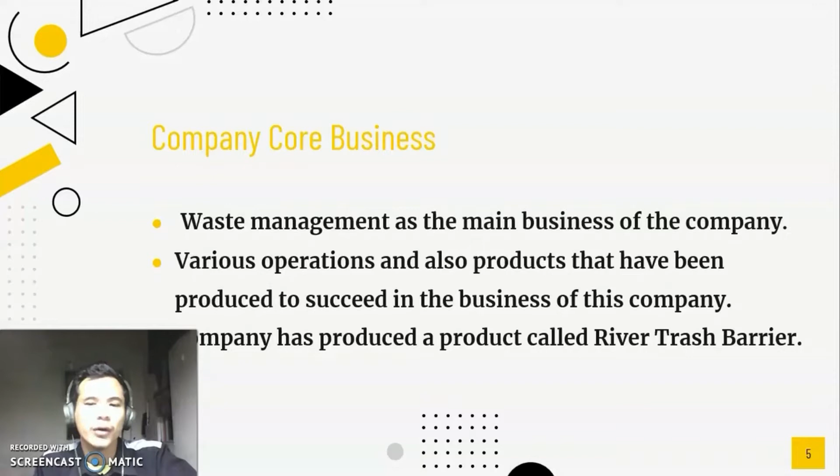Every company has their own vision and mission. The company's goal is to extract as much plastic and floating waste from rivers as possible. We want to achieve this through 4 pathways. The first one is clean up the plastic soup in rivers using our product River Trash Barrier. The second one, increase awareness of our product River Trash Barrier as a site for public tours and educational programs.

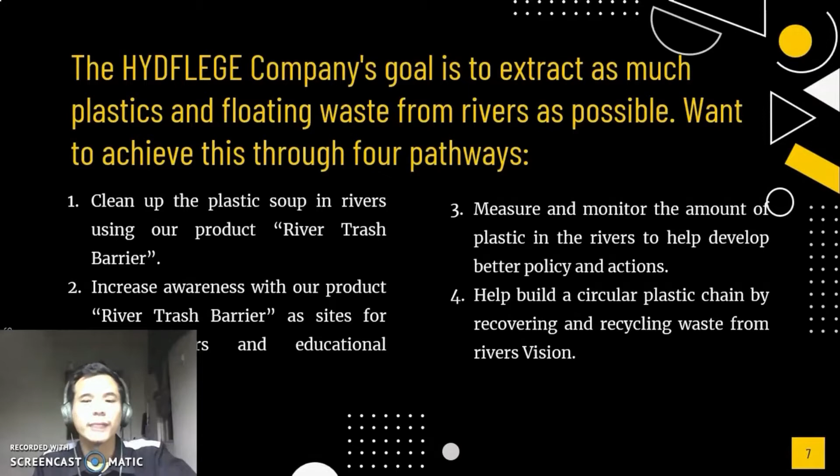The third one, measure and monitor the amount of plastic in the rivers to help develop better policy and action. The last one is help build a circular plastic chain by recovering and recycling waste from rivers.

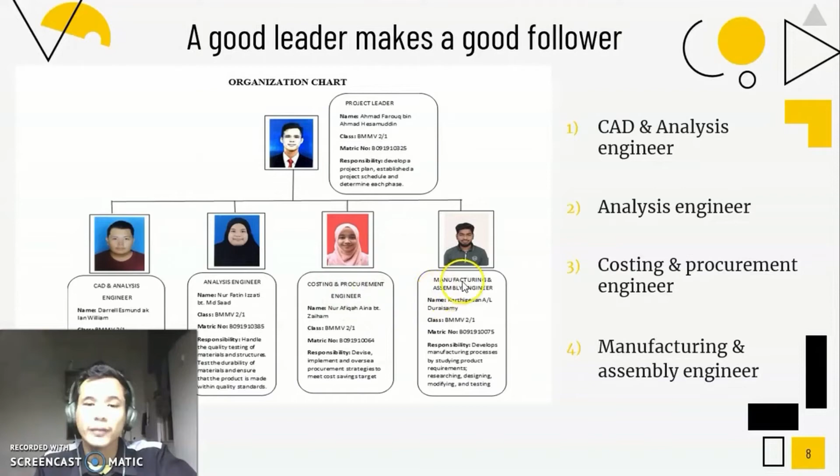So as we can see here, this is our organization chart. So you can see that is me as a project leader. We can hear that a good leader makes a good follower. So in our organization, we have a CAD analysis engineer, costing and procurement engineers, and the last one, we have manufacturing and assembly engineers.

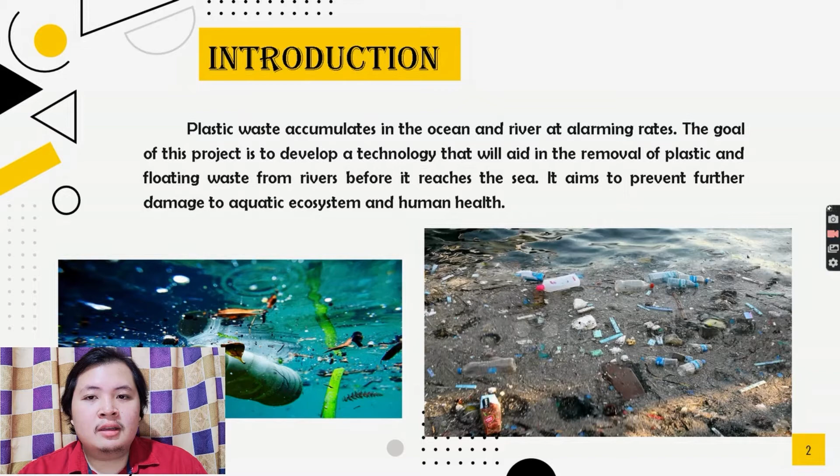Hello, my name is Darrell Esmund. I am the CAD and Analysis Engineer. So now I'm going to explain about Chapter 1, which is the introduction and the background theory. So for the introduction, as we all know, plastic waste accumulates in the ocean and rivers at alarming rates. So the goal of our project is to develop a technology that will aid the removal of plastic and floating waste from rivers before it reaches the sea.

So next is the problem statement. Rivers play a crucial role in human life. Although there are a lot of mechanisms created to reduce and control water pollution, the mechanisms still do not satisfy the requirements and are limited in scope. Most of the rubbish barriers are smaller in size. So when the barrier is small, the barrier needs to be cleaned more often.

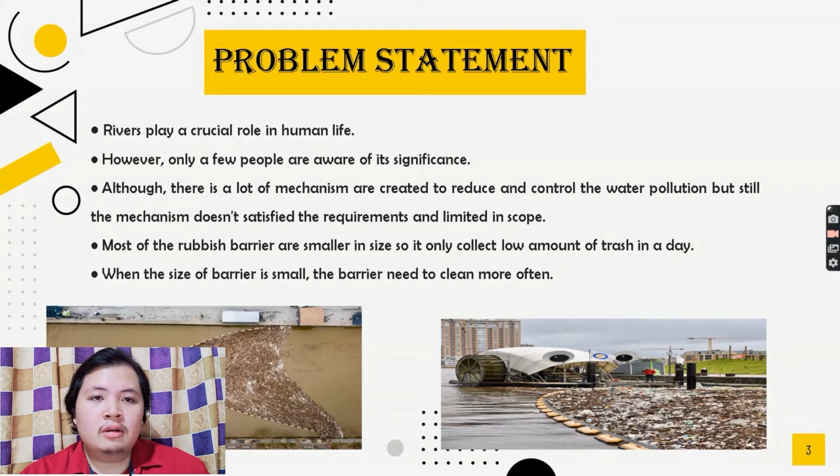So for the objectives of our project, there are three. The first one is to create a trash barrier which attaches to the riverbank in urban areas to collect the floating waste. Second, to design products that have aspects such as safety, aquatic friendly, and low maintenance. And lastly, the durability of the product should last longer than the existing products in the market.

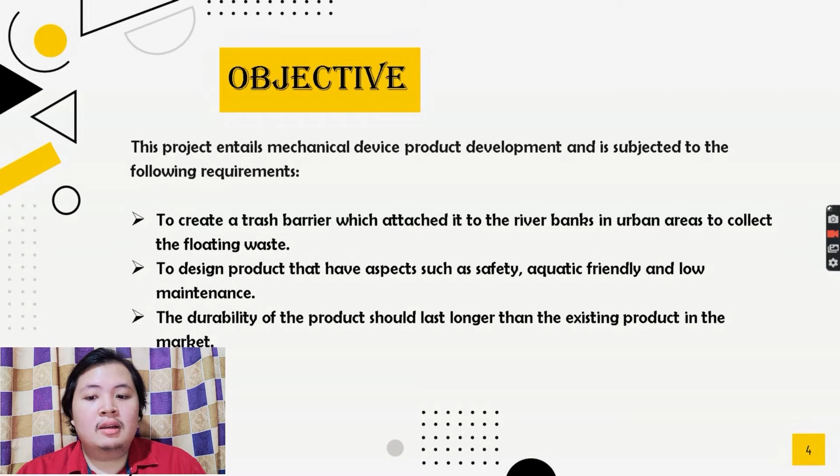So now I'm going to explain about chapter 2. As you can see from the slide, this is our flowchart. We start by defining a problem, and then we generate ideas from the problem. Next we did some literature study and some conceptual design. There are three design concepts that we did, and we picked one. We also did the final design using SolidWorks and analyzed it.

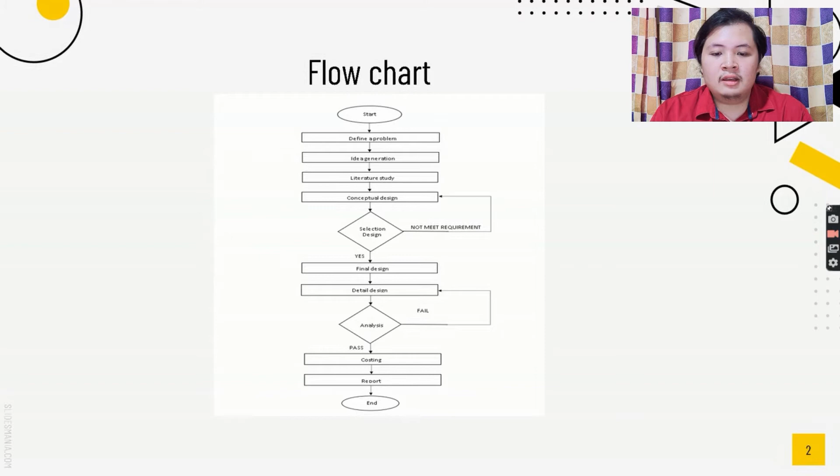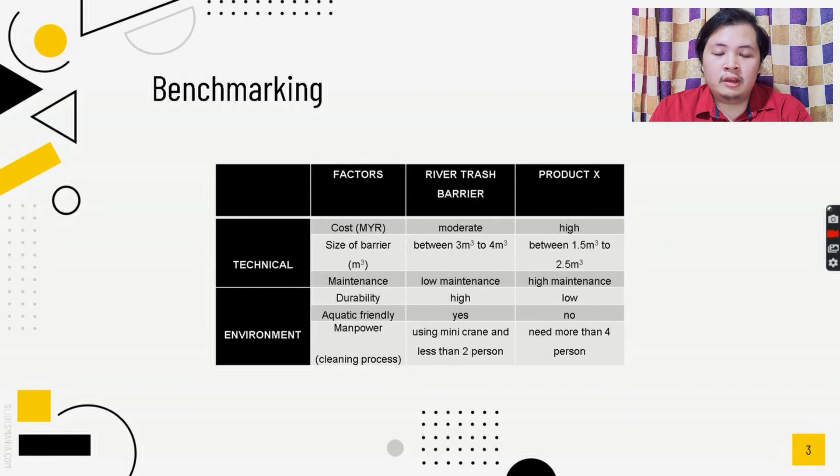Next is benchmarking. There are a few factors that we considered, which are the cost, size of barrier, maintenance, durability, aquatic friendly, and manpower. So we compare our product with other products. You can see the comparison on the slide.

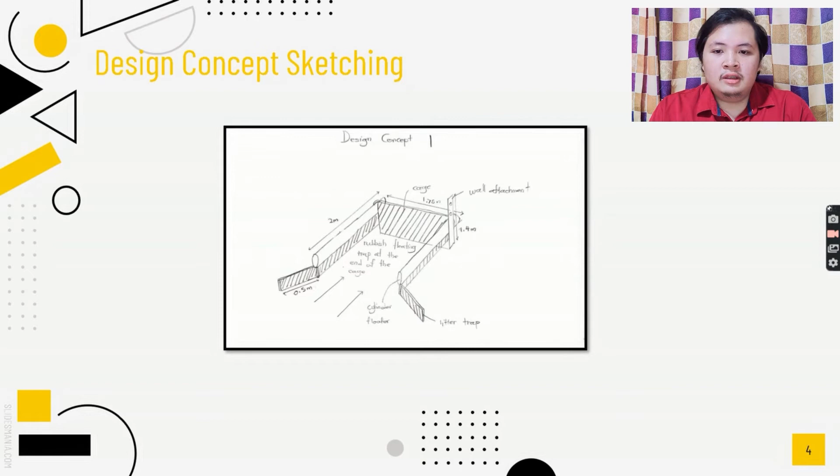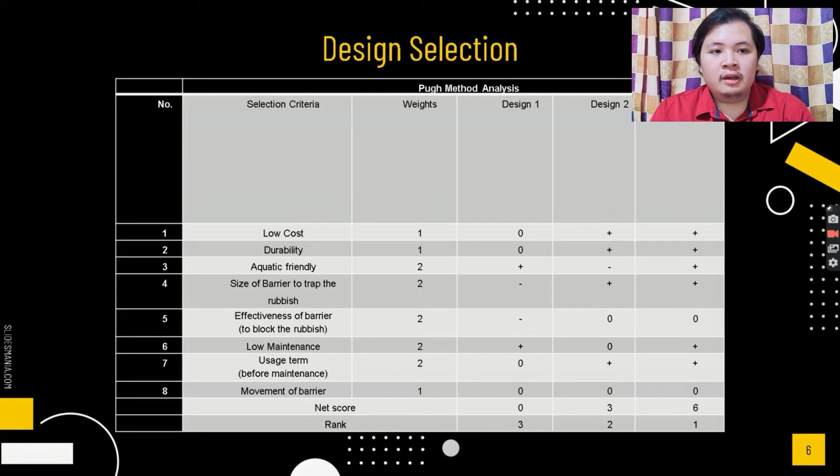There are a few selection criteria for the analysis. The first one is low cost, durability, aquatic friendly, size of the barrier, the effectiveness of the barrier, low maintenance, usage term, and movement of barrier. So we calculate the net score and rank each of the designs.

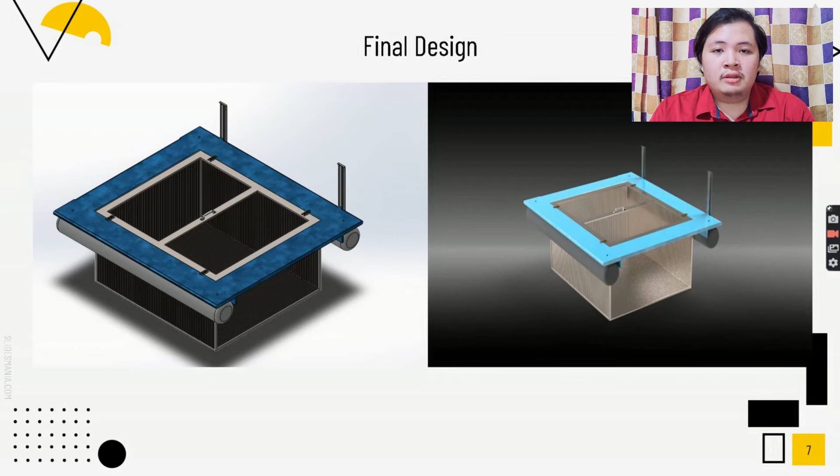My name is Naafkaina binti Zahra. My matric number is P09110062. I'm from BMMV 201. As a costing and procurement engineer, I will explain chapter 3, which is product development.

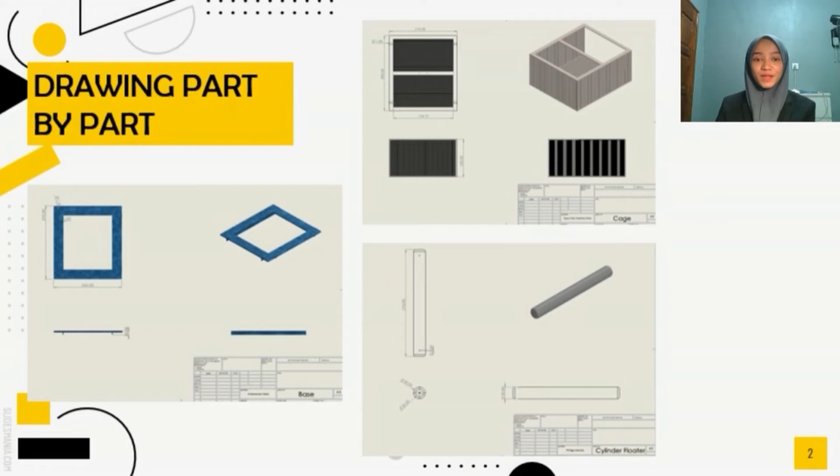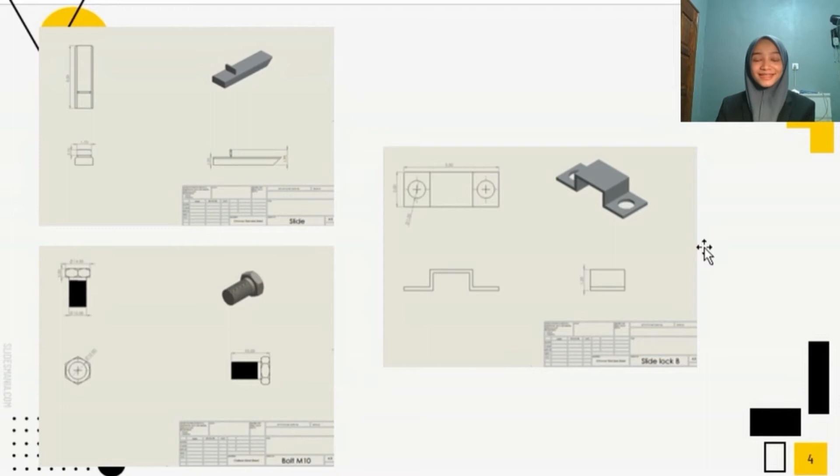Okay, so first of all, we have a drawing part by part. First, we have a base on the top of the cage, and then we have a cylinder floater to support the cage to float on the surface of water. Next, we have a wall attachment to support the cage to stick to the river banks, and then we have a cage handle, slide lock A, slide, bolt M10, slide lock B, and then we have a washer, nut M15, and the last one, bolt M15.

Okay, next we proceed with the working principle. The cylinder floater has been designed to float on the surface of water, and it is made out of highly durable high-density polyethylene, HDPE.

This product will be installed to the river banks according to the river flow to trap the trash easily. This project fully uses renewable energy. A maintenance schedule has been prepared in order to address the issue of the trash accumulating in the barrier overflowing.

And then with the help of the adjustable wall attachment here, these products are able to adjust their height to facilitate the maintenance and cleaning process. The barrier has been designed to be simply removed and reinstalled.

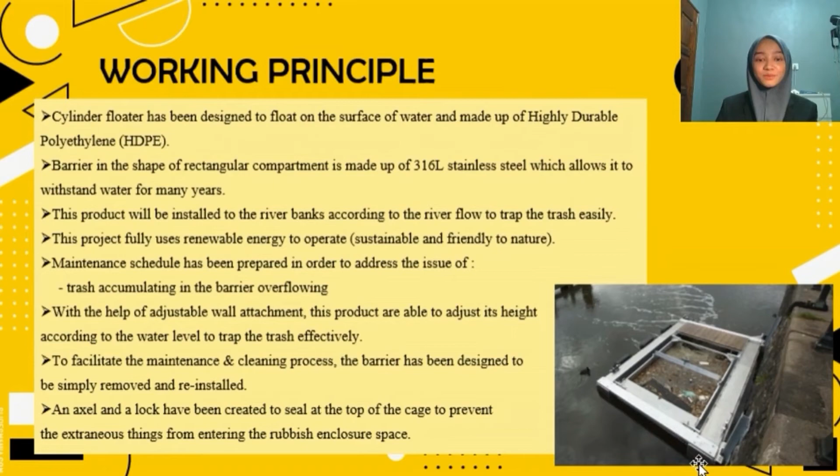Cost calculation. Okay, so first we have 1 piece of galvanized steel plate for the base, costing 109 ringgit 81 cent. Next we have 70 ringgit for 2 pieces of high-density polyethylene cylinder floater. Then 77 ringgit 83 for 1 pair of carbon steel sheet wall attachment.

Next, 13 ringgit 24 cent for 4 pieces of slide lock A chrome stainless steel, and 11 ringgit for 4 pieces of slide lock B chrome stainless steel. And then we have 25 ringgit for 1 piece of cage handle carbon steel sheet. 1 unit cage type 316L stainless steel costs 494 ringgit 16 cent.

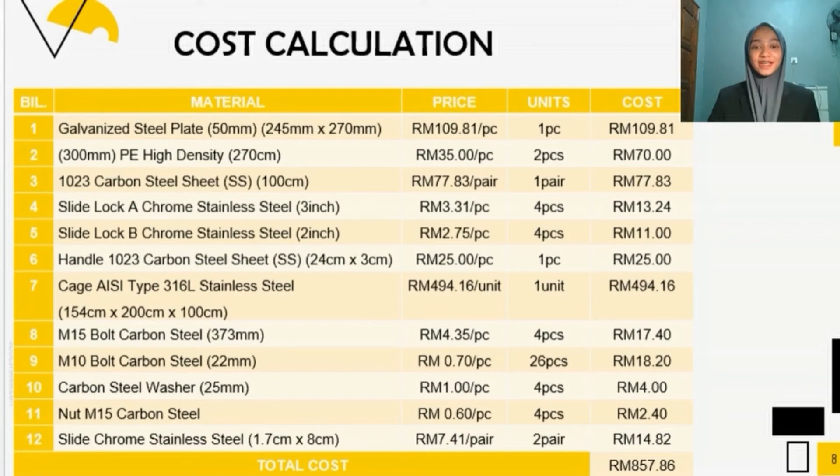We also have 17 ringgit 40 cent for 4 pieces of M15 bolt carbon steel, 18 ringgit 20 cent for 26 pieces of M10 bolt carbon steel, and then 4 ringgit for 4 pieces of carbon steel washer. Next, 2 ringgit 40 cent for 4 pieces of nut M15 carbon steel, and the last one is 14 ringgit 82 cent for 2 pairs of slide chrome stainless steel. By the way, all these items and price quotations are obtained from shopee.com.my and alibaba.com.

Then for the last part, we have the process of safety. This project has been studied and tested before it is marketed, and is created using high durability components and evaluated with research and factor of safety distribution. This process involves environmental and sustainability factors. That's all for me as a costing and procurement engineer.

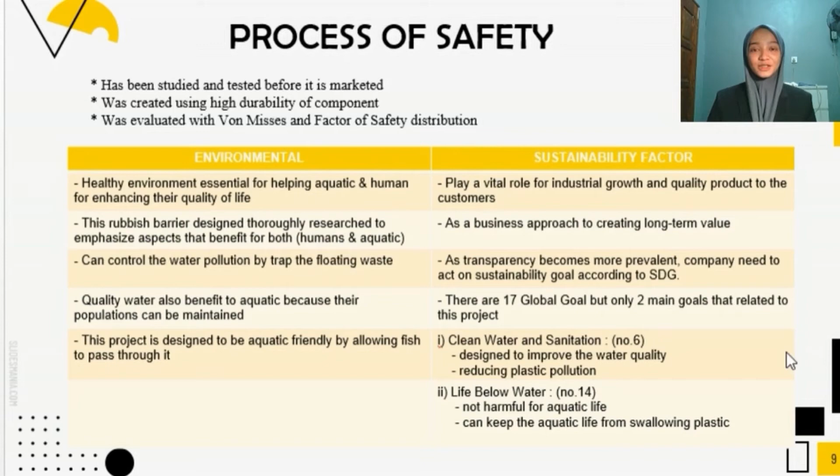I am the analysis engineer. Material properties. For the cage, we choose the material type 316L stainless steel. The material used by this barrier is 316L stainless steel, which has a mass density of 8027 kg per meter cube. Stainless steel remains stainless, or does not rust, because of the interaction between its alloying elements and the environment. The excellent balance of properties makes 316L stainless steel the ideal material for replacing other metals in the application, to make it long-lasting in the water.

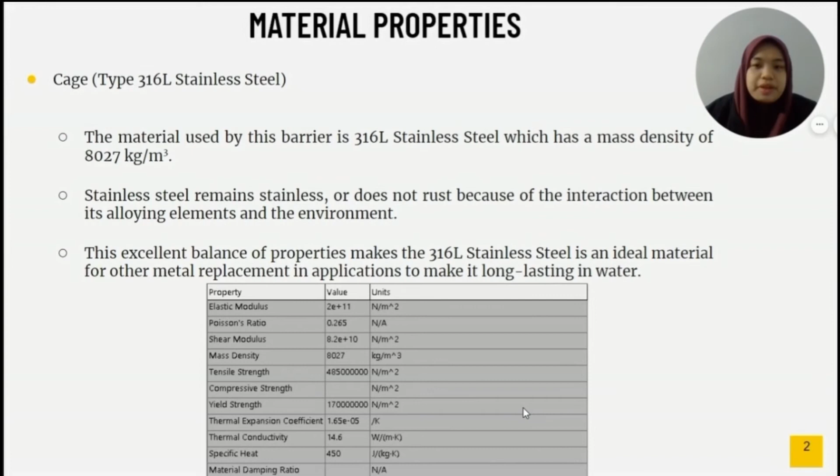Analysis result. Okay, von Mises stress is a value that is used to determine whether a material will yield or fracture. As shown in the image, this is the view after we apply the von Mises stress to our product. After applying, the minimum stress is 1.348 Newton per meter square, and the maximum stress is 1.086 times 10 to the power of 7 Newton per meter square.

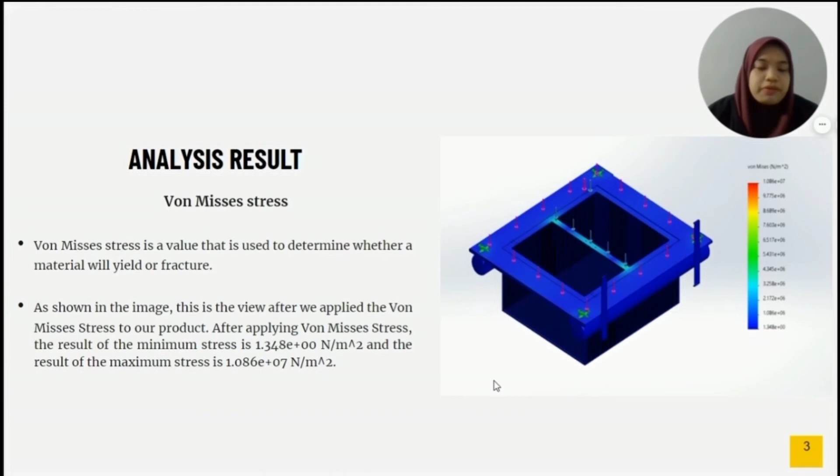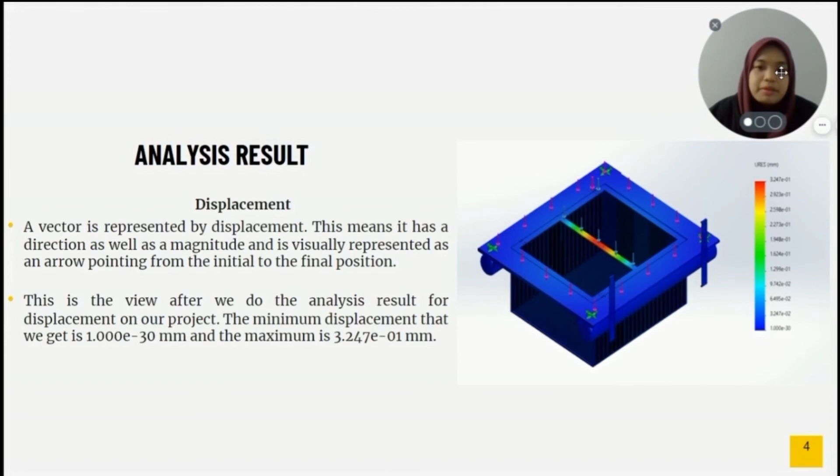Second is the displacement. A vector is represented by the displacement. This is the view of the displacement analysis result on our project. The minimum displacement that we get is 10 to the power of negative 30 mm, and the maximum is 3.247 times 10 to the power of negative 1 mm.

And lastly is the factor of safety. A factor of safety (FOS), also used interchangeably with safety factor, is an engineering term. This is the conclusion of the analysis for the safety factor. The minimum and the maximum values are 1.878 times 10 to the power of 1 and 2.097 times 10 to the power of 8 respectively.

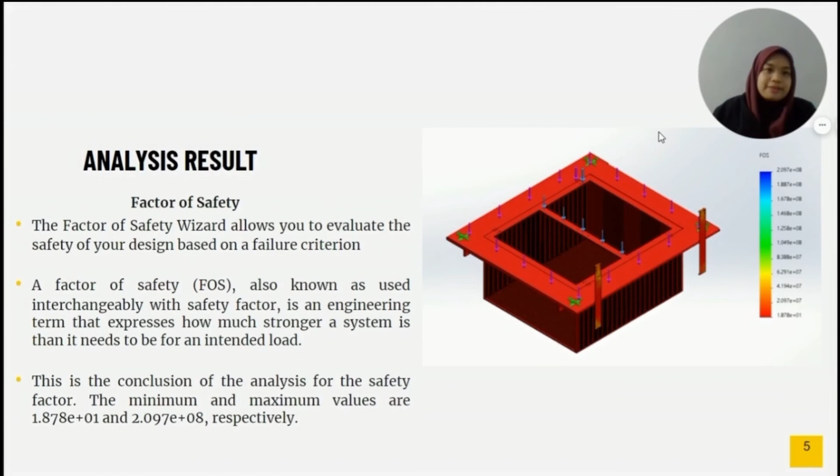Failure analysis: design failure mode and effect analysis. We have two items, wall attachment and cylinder floater. Okay, for the wall attachment, the potential failure mode is a sliding failure. For the cylinder floater, it is a floating failure. The probability for the wall attachment is C, occasional failure. For the cylinder, we choose B, remote failure, relatively few failures.

Severity: for the wall attachment, we choose type 3, that is minor. And for the cylinder, we choose type 2, very minor. Detection: we choose type 4. For the cylinder, we choose type 5.

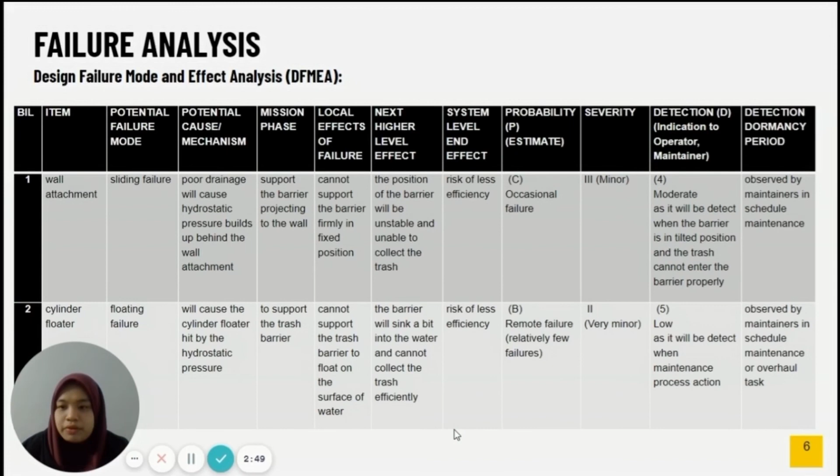Improvement of the product. First, follow up with the buyer. Consider sending customers an email after they make a purchase. When the purchase is fresh in their mind, you are more likely to receive a review. Second, product quality. The company places a high value on product quality. Product quality can be defined as an overall or specific aggregate value of satisfaction with the product function and characteristics.

And lastly is adding new features. The addition of new features broadens the scope of the existing product, adding benefits to the product such as trash storage space, chemical water filter, and so on.

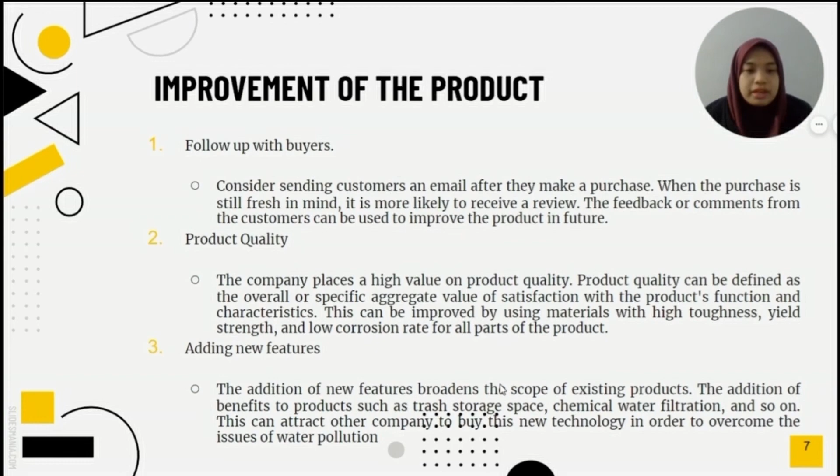For the conclusion of our project, it can be said that all the objectives for the river trash barrier were met. The objectives were achieved through numerous problems and issues that arose from the analysis. All the problems were accounted for and dealt with according to the specific methodology. The primary goal of the research is to reduce water pollution in the river in order to improve water quality.

Improvement in practice and procedure will allow for more effective planning and education. The river trash barrier aids in the efficient and productive management of the ecosystem. It has an eco-friendly system that ensures the product does not harm the environment.